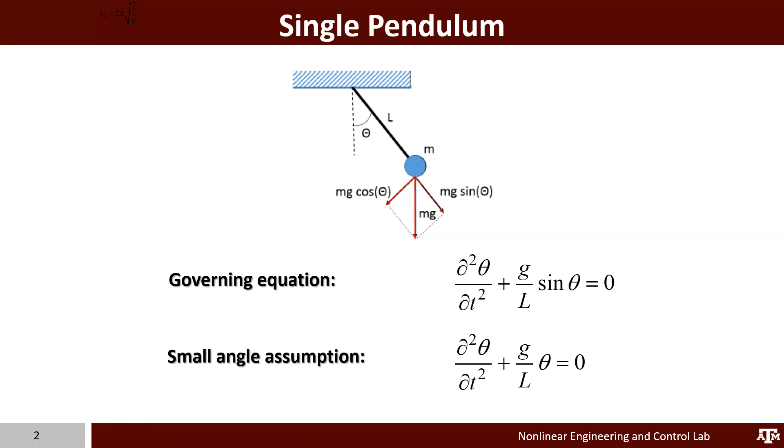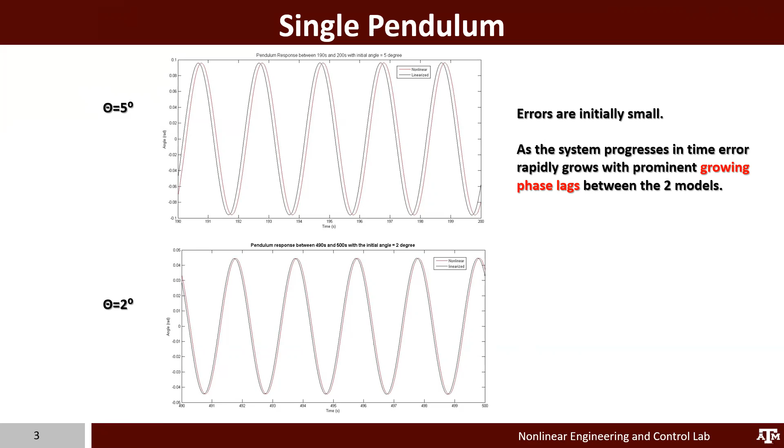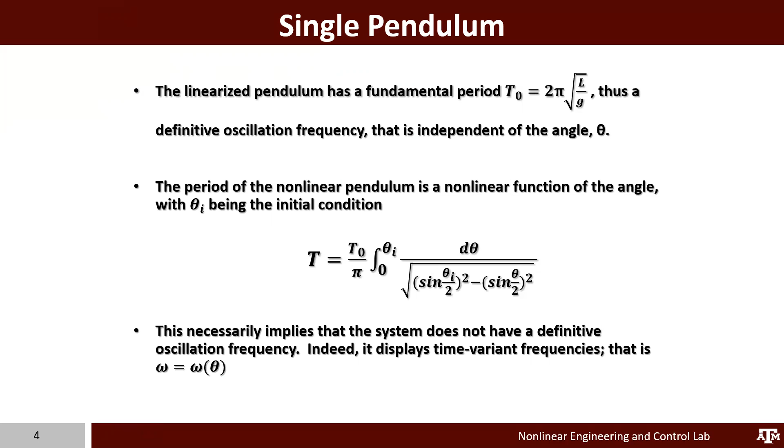And indeed, for the linearized pendulum, there is a definitive fundamental period, which is not a function of theta. But however, for the nonlinear pendulum, the period, or in other words, the frequency, is a function of the initial condition theta_i. This necessarily implies that the system does not have a definitive oscillation frequency. Indeed, the frequency is time variant, it depends on theta.

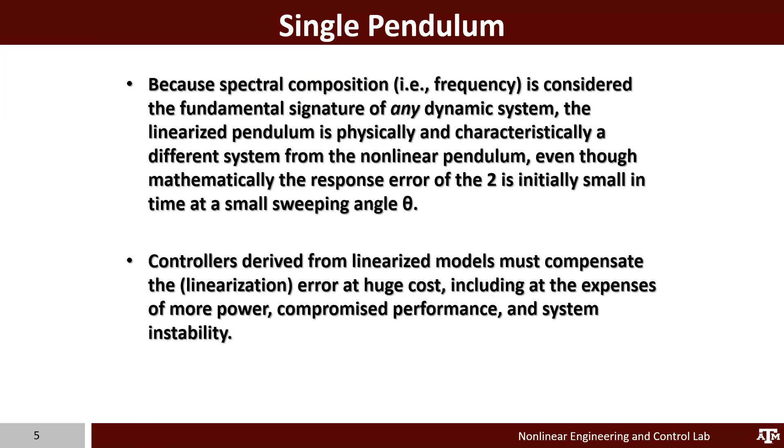Because the spectral composition is considered the fundamental signature of any dynamic system, the linearized pendulum is physically and characteristically a different system from the nonlinear pendulum. Controllers derived from linearized models therefore must compensate the linearization error at a huge cost, including at the expense of more power, compromised performance, and system instability.

Let me make a few arguments out of those observations that we made with the linear and nonlinear pendulums. Linearization distorts and misinterprets true dynamics. The moment Taylor's expansion is employed, stationary dynamics is assumed.

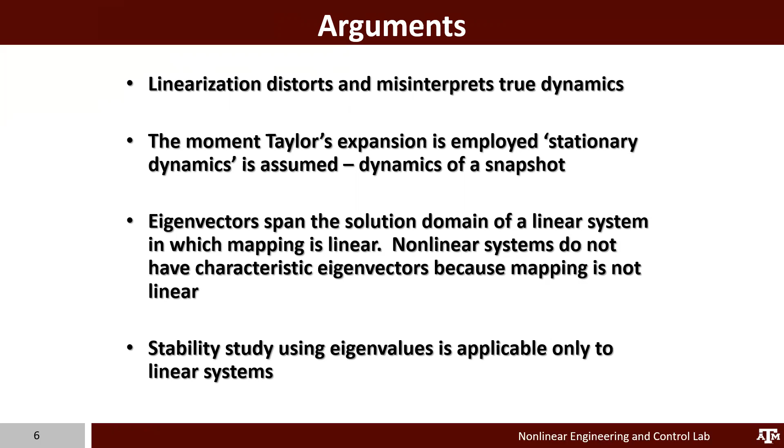Eigenvectors are mutually orthogonal, so they are basis functions that span the solution domain of a linear system, where the mapping is linear. However, nonlinear systems do not have characteristic eigenvectors because the mapping is not linear. Stability study using eigenvalues is therefore only applicable to linear systems.

Contemporary control theory shares the following: they usually engage in linearization, most if not all of them ignore time-frequency coupling, they also employ feedback, and they also make assumptions to make the solution process easier.

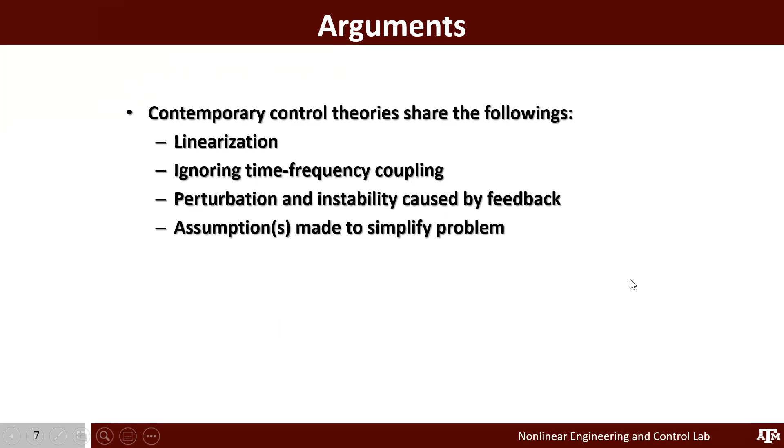The issue with linearization, as we saw with the example on the pendulum, is that it distorts the genuine characteristic of nonlinear dynamics. And plus, the linearized system is not able to resolve the route to chaos.

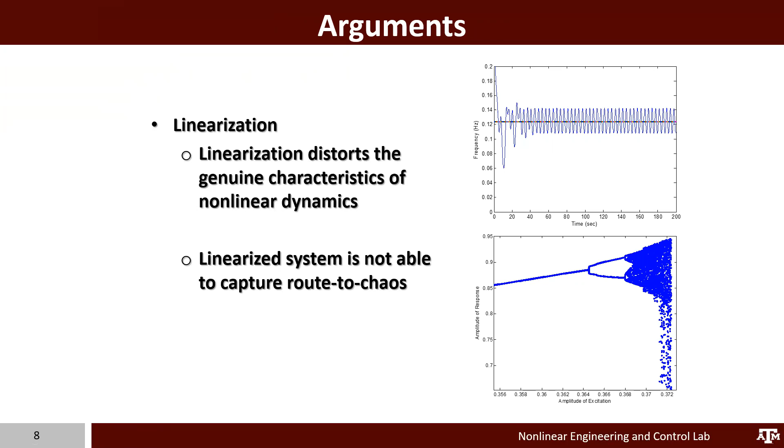The second thing is, we all know through the uncertainty principle, right, that time and frequency are coupled. They're two sides of the same coin. And then later on, I'm going to use several examples to show you that for a chaotic system, the frequency response is unstable as well as broadband.

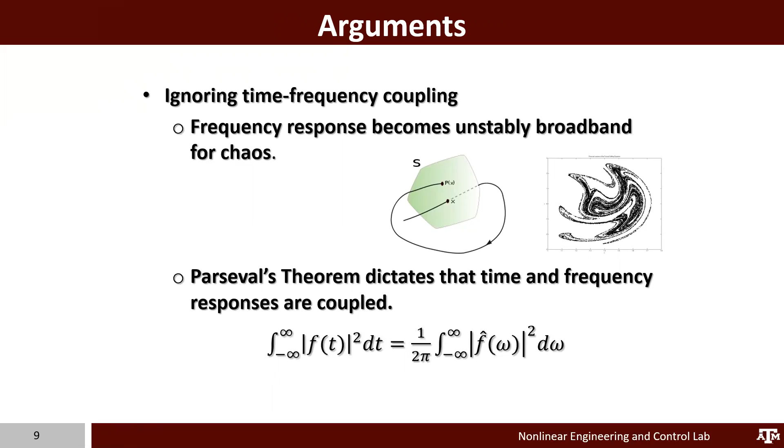Employing feedback, because nonlinear systems are all highly sensitive to initial conditions, the feedback essentially provides the system with ever-changing different initial conditions for each and every control loop, and that serves to perturb the system. I'm going to use an example to demonstrate this point later on.

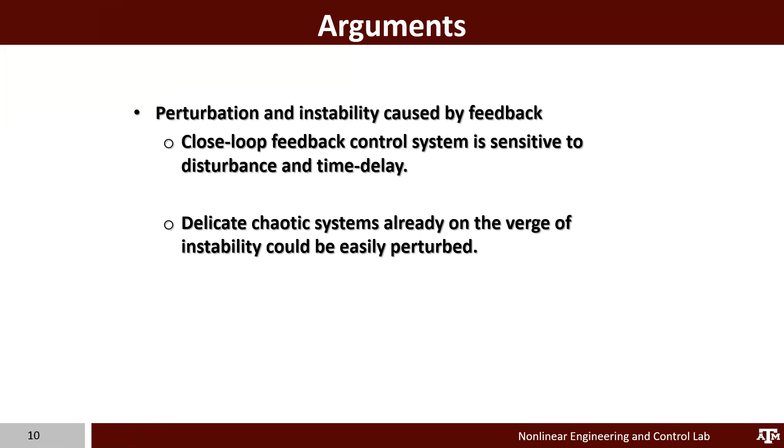With the feedback feature implemented, the system actually tends to behave in a way that at the minimum shows instability, and at worst shows something that is aphysical.

The assumptions, oftentimes all kinds of assumptions were made. The most prominent one was assuming that the route to chaos process is stationary. But however, in the true physical system, route to chaos is non-stationary.

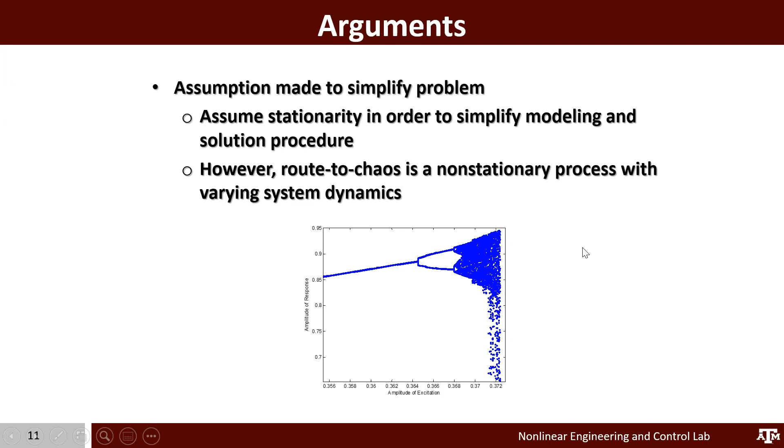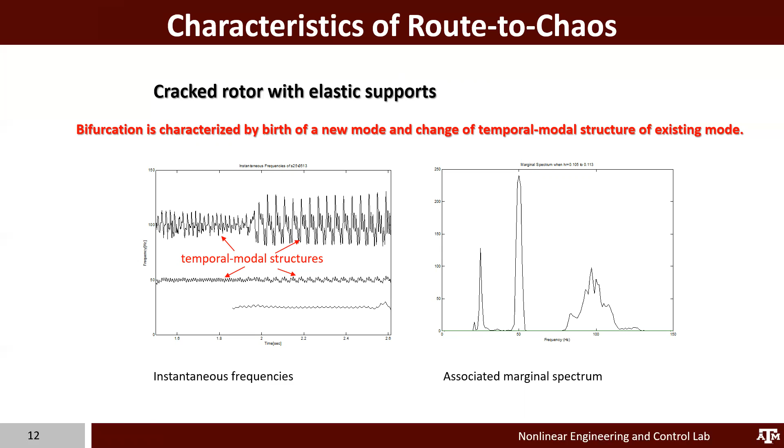These are the fundamental characteristics associated with a system undergoing instability on its way to chaos. As the dynamics deteriorate even further, we see more lower frequency modes being born, accompanied by rather prominent, significant changes of temporal modal structure in the existing modes.

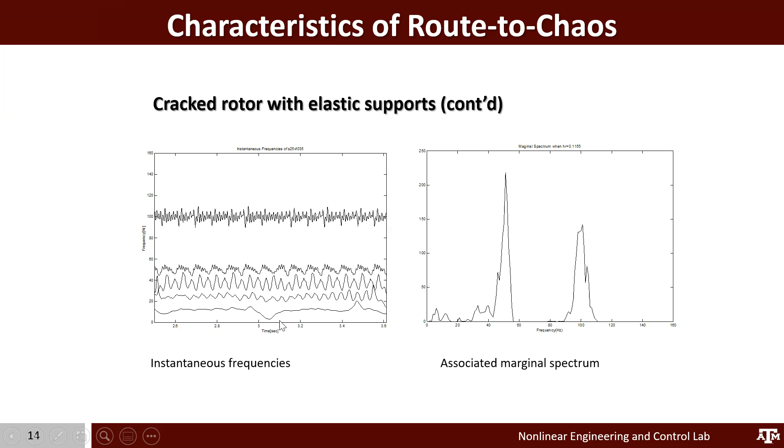So that was the preliminary observation when a system is undergoing bifurcations and becomes unstable. Let me give a quick review of more than a dozen modern day control theories.

The first one, probably the most well known, is the OGY method. OGY perturbs a discontinuous parameter. It forces a trajectory to follow a target UPO in a chaotic attractor, and the OGY method uses the eigenvalue of the system's Jacobian at a fixed point to establish stability.

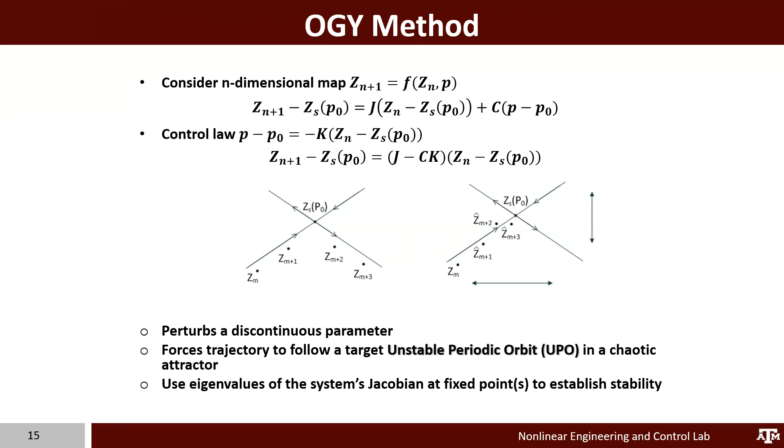Let me sidetrack just a little bit to point out that Jacobians, which employ Taylor series, are actually a multidimensional linearization, as we can see, with only the linear terms in the equation being retained.

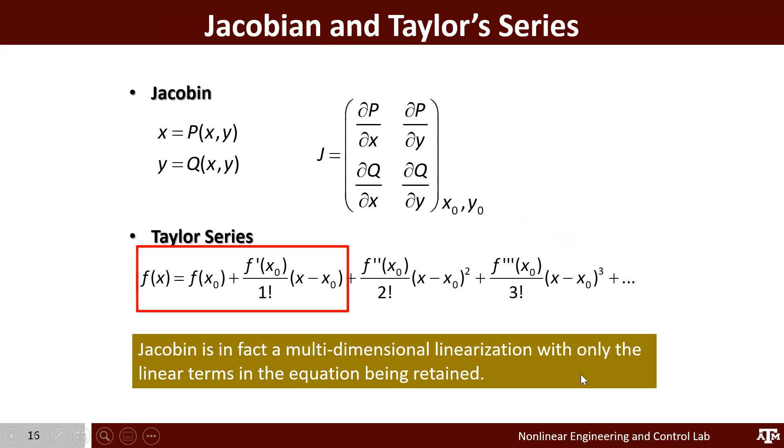But this controller is only effective up to a certain point, and beyond that, the system becomes unstable. This dynamic instability rather abruptly becomes highly unstable, extreme. So this OGY method, being based on the Jacobian, can only be applied in the proximity of a predetermined fixed point.

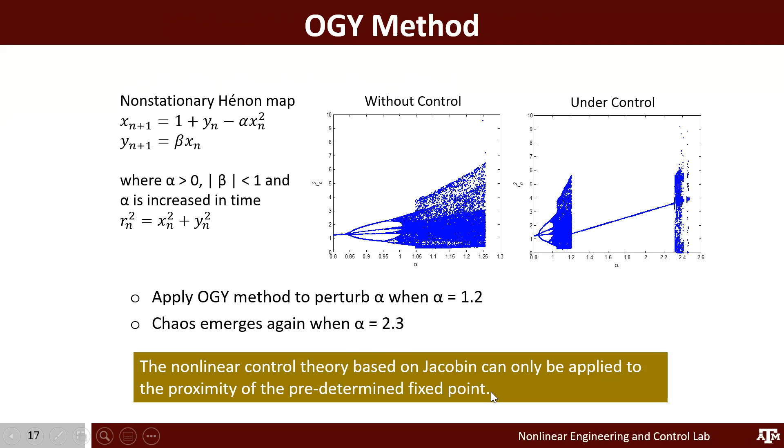The second method I would like to review is Lyapunov-based control. Lyapunov requires the design of a control law based on heuristic methods.

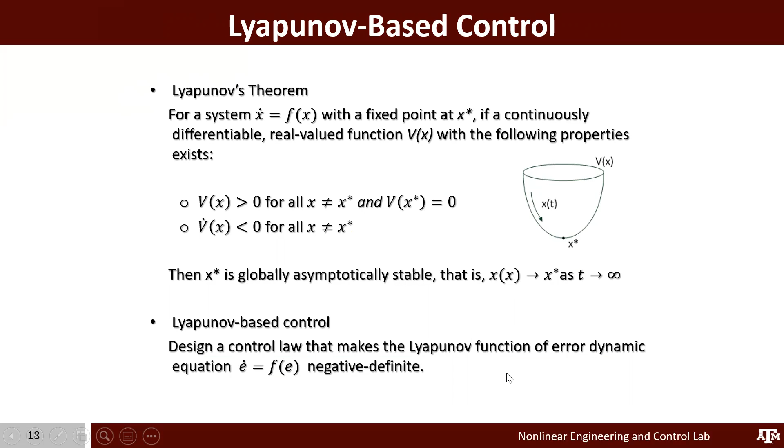This is an example applying Lyapunov-based control to two Duffing oscillators. We consider two Duffing oscillators, with the second one having a forcing term which is non-stationary. We apply Lyapunov-based control to the stationary model and also to the non-stationary model, and you can see from the two corresponding instantaneous frequencies that Lyapunov-based control worked well.

However, from this graph, we can see that when the model is non-stationary, Lyapunov-based control basically breaks down. We see that all the frequency modes become highly unstable, and it becomes progressively more broadband.

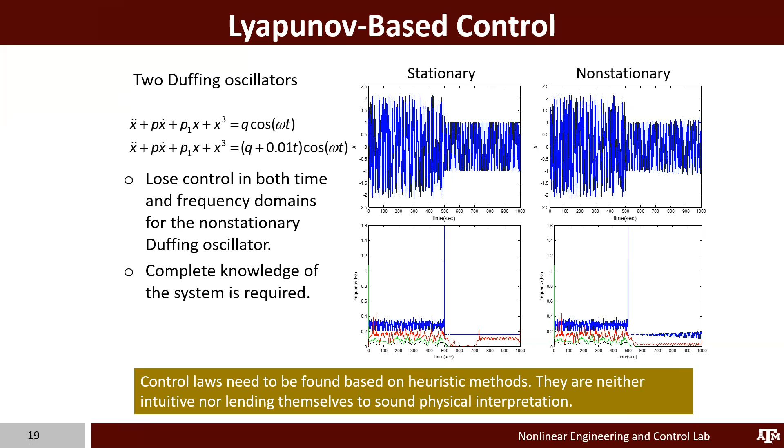I would also like to make a comment on Lyapunov-based control: the control law is usually neither intuitive nor lending itself to sound physical interpretations.

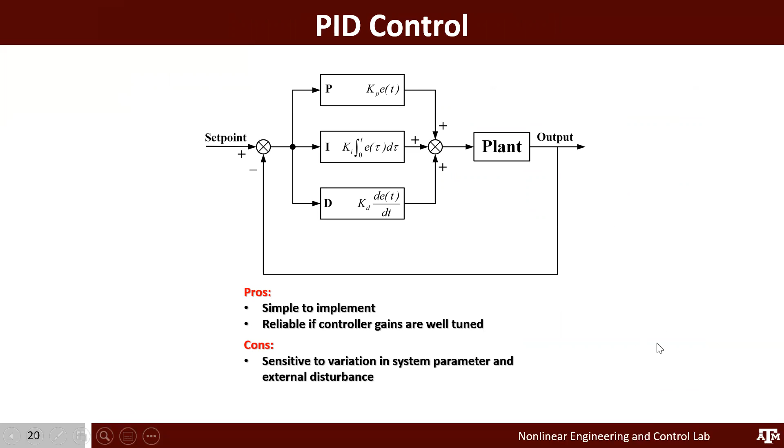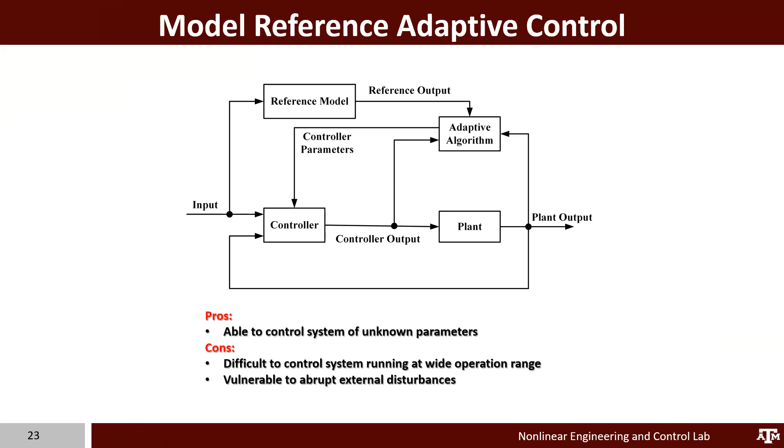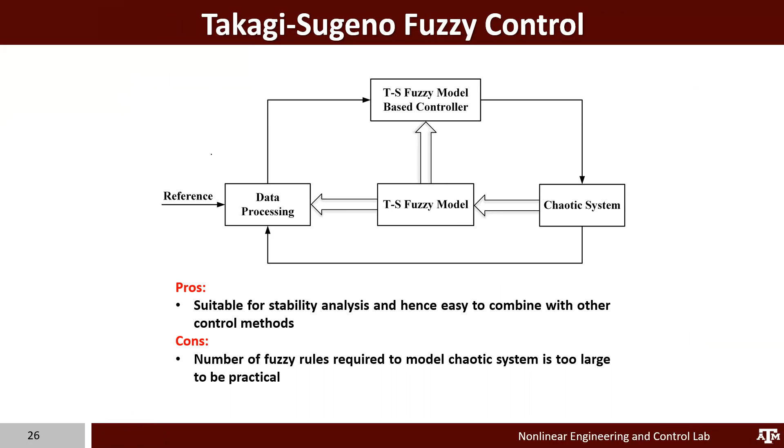Quick review: there is also PID control, which is quite common, those being the most common applications. Also adaptive PID control, fuzzy logic control, model reference adaptive control, feedback linearization control, time delay feedback control, Takagi-Sugeno fuzzy control, and sliding mode control. This control methodology has gained very wide popularity in the last few years.

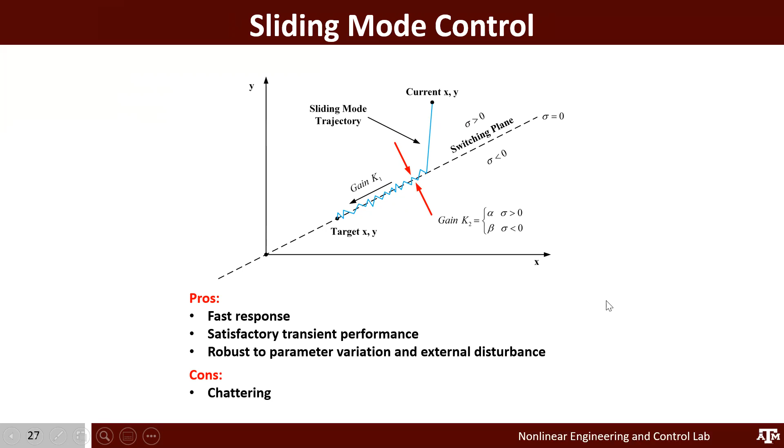The issue with it is there is always chattering. Chattering indicates instability, indicates high frequency. It has all kinds of negative impact on control stability and also robustness.

Adaptive control and backstepping control: there are several issues with this particular control methodology. The control design is tedious, and the control law is oftentimes too involved to be practical.

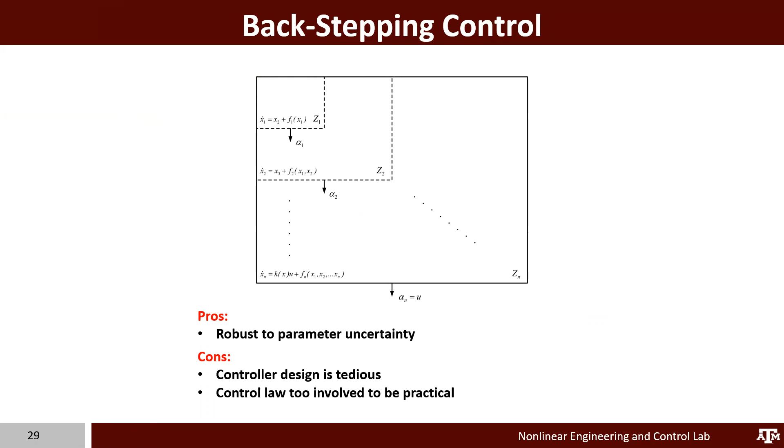Let me summarize the observations from the review we made over the last dozen slides or so. We reviewed the control theories, and they all fail to mitigate dynamic chaos.

A priori knowledge of the system needs to be available for the control theory to be effective. And none control both time and frequency response simultaneously.

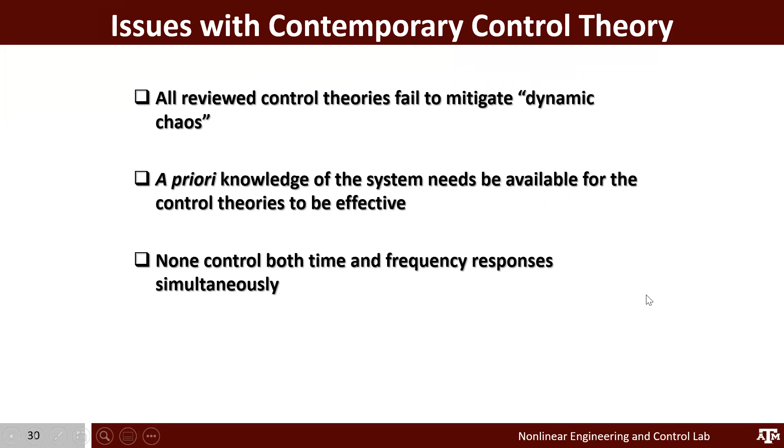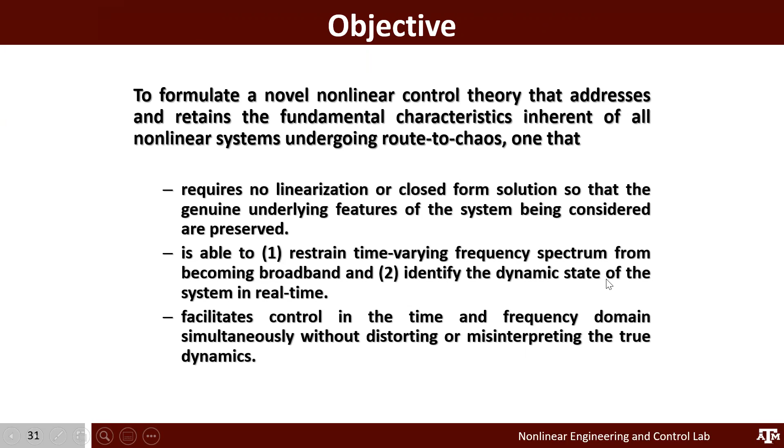So about 15 years ago, I wanted to formulate a novel control theory that addresses and retains the fundamental characteristic inherent of all nonlinear systems undergoing route to chaos. A theory that requires no linearizations or closed form solution, so that the genuine underlying features of the system being considered are preserved. The theory also needs to be able to restrain time varying frequency spectrum from becoming broadband, and also be able to identify the dynamic state of the system in real time. Lastly, the theory needs to facilitate control in the time frequency domain simultaneously without distorting or misinterpreting the underlying true dynamics.

At that point in time, I developed a task plan with several tasks identified and defined. The first is to investigate route to chaos in time and frequency domain concurrently, to identify the essential elements of nonlinear control through studying the inherent property of bifurcation and chaos. These are fundamental to developing a nonlinear control theory that requires no linearization and closed form solution. And how do I facilitate simultaneous time frequency control? Through accessing wavelet transform.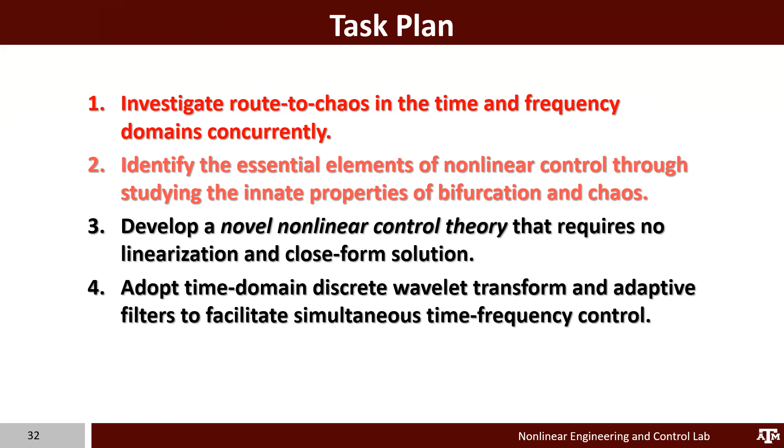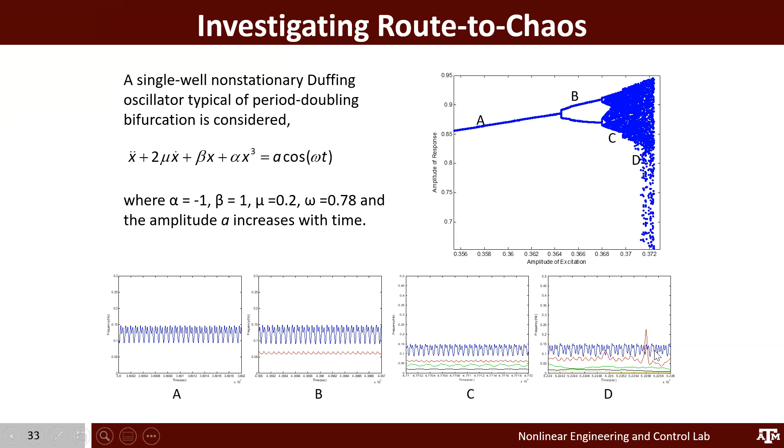As you can see, region A has one single mode with very well defined temporal modal structures, with this frequency seemingly oscillating following a specific period in time. And then as the system becomes further bifurcated into B and C, what we see is more modes showing more sophisticated temporal modal structures. And then as we reach into region D, the overall Duffing oscillator system response actually becomes broadband.

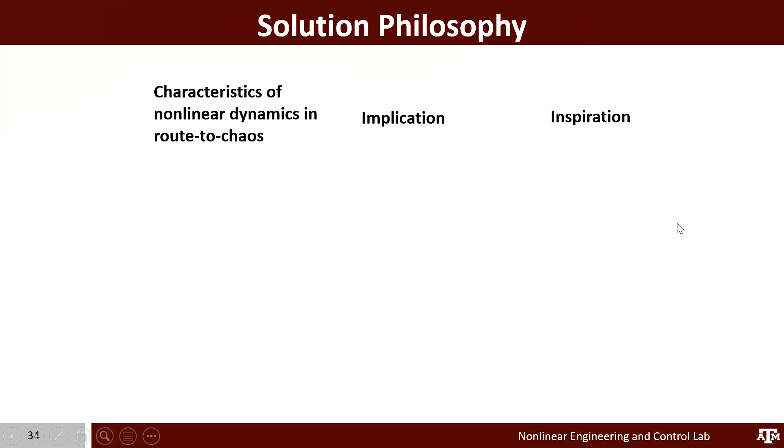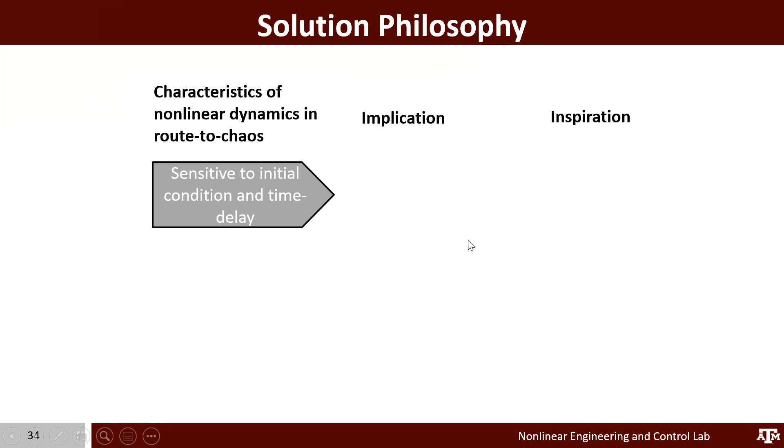So now let me summarize my solution philosophy, based on all the observations we made with regard to the property of nonlinear response. The first is a nonlinear system is highly sensitive to initial condition and time delay. This implies the use of feed-forward control concept.

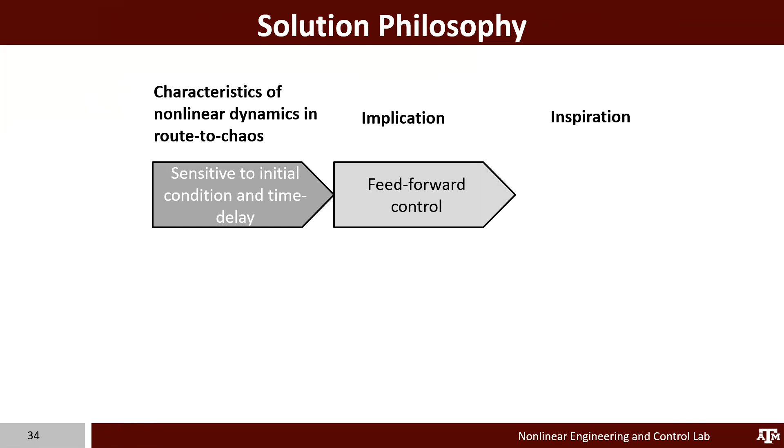And then I took inspiration from adaptive filter. The second property is deteriorations in both time and frequency domain. When the dynamic system becomes unstable, as it takes up a route to chaos, the deterioration is actually in both time and frequency domain. This implies the need for addressing both time and frequency responses at the same time. And I took inspiration from discrete wavelet transform.

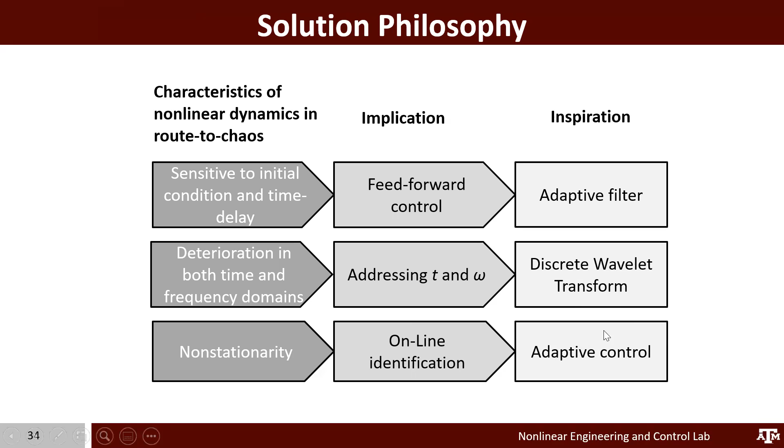The last property is a route to chaos is time dependent. The entire process is non-stationary. This implies the need for online identification, if proper control is to be secured and realized. And I took inspiration from modern day adaptive control.

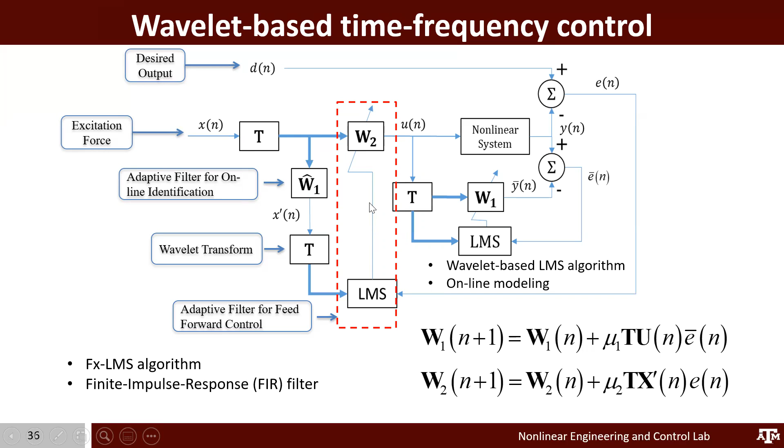And to update filter W1 and W2, we need to pay attention to this optimization step size, mu1 for W1, mu2 for W2. As you can see from this steepest descent algorithm for updating the filter coefficient, mu1, which is the optimization step, is important in the sense that it essentially determines the convergence speed, the solutions and stability.

So if mu1 was not properly chosen, then it may not be easy to have converged solutions, and the system could easily become unstable. And then through rather meticulous iterations, we found that mu1 can be updated at each and every control step using this simple criteria.

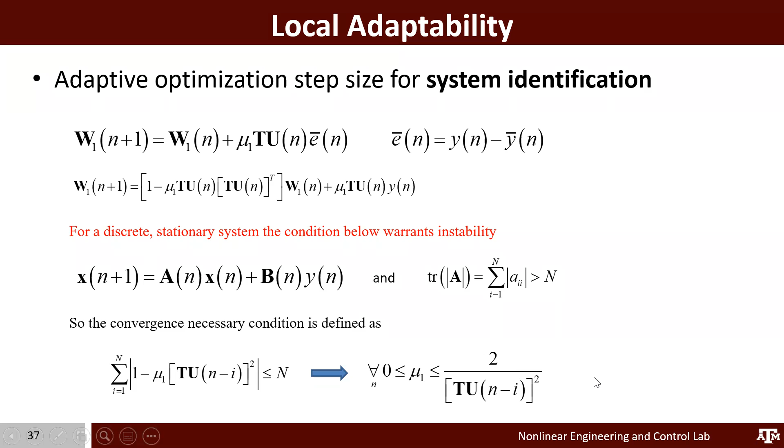Same thing with mu2, which is used for updating the W2 filter for facilitating controlling input. Through very meticulous derivations, the entire process took about 126 equations to eventually allow us to arrive at this, which establishes the criterion for setting up the optimal step size for mu2, for updating the filter W2.

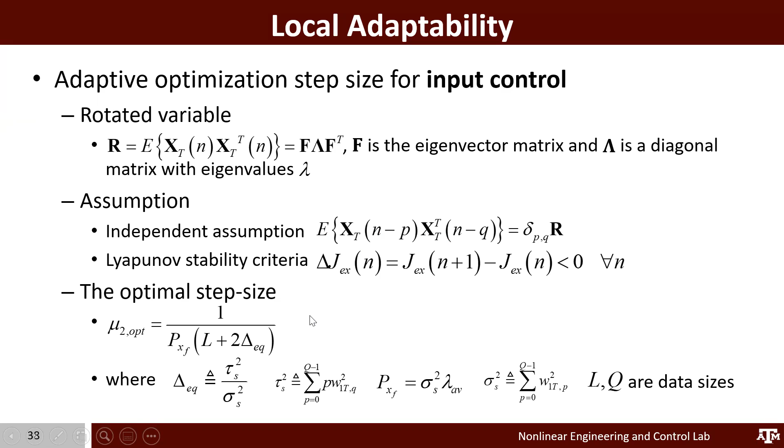Mu1 and mu2 are both updated at each and every control step. That's why I named it both our control theory as one with local adaptability. The use of proper mu1 and mu2 ensures the stability and fast convergence of the controller.

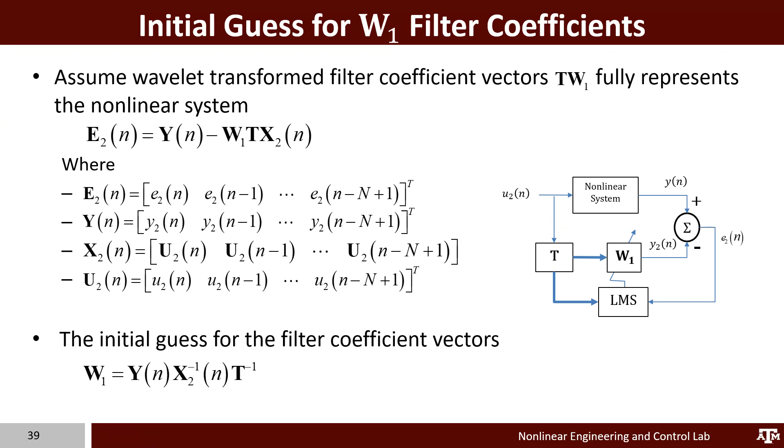And also, because we're dealing with control theory for controlling nonlinear systems, it's very important that we get the W1 filter coefficients and the W2 filter coefficients right for the first guess, in terms of the initial conditions. Through a rather meticulous, comprehensive derivation, we also have a way to show what would be the optimal, proper initial guess for the W1 filter coefficient as well as W2.

Now it's time to apply the control theory to a few applications to demonstrate the viability of this control theory. The first one we consider is the grazing control of a vibro-impact oscillator. As the name grazing indicates, this is a discontinuous system, and grazing, as a sophisticated, rather involved discontinuous dynamics, is very difficult to control.

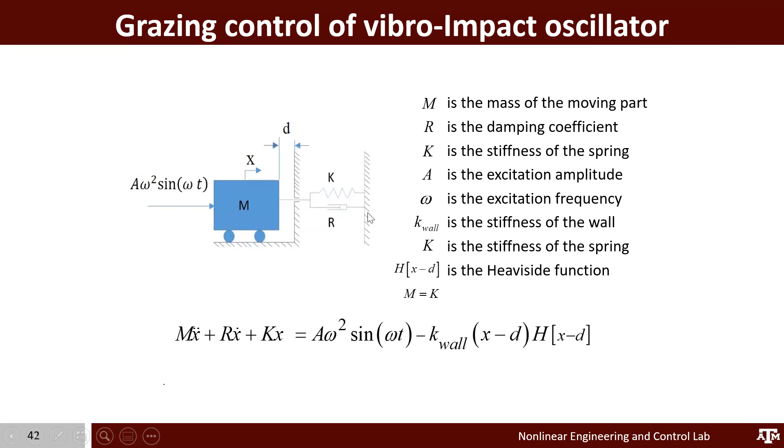So now this is the model that we use, with the Heaviside functions defined as such. Essentially, this is a cart driven by a harmonic input, and this cart, without a controller, would run into and make an impact with the wall on the right. Through the proper use of X0, we normalize and turn the space variables into dimensionless terms, so the entire governing equation now looks like this with dimensionless state variables.

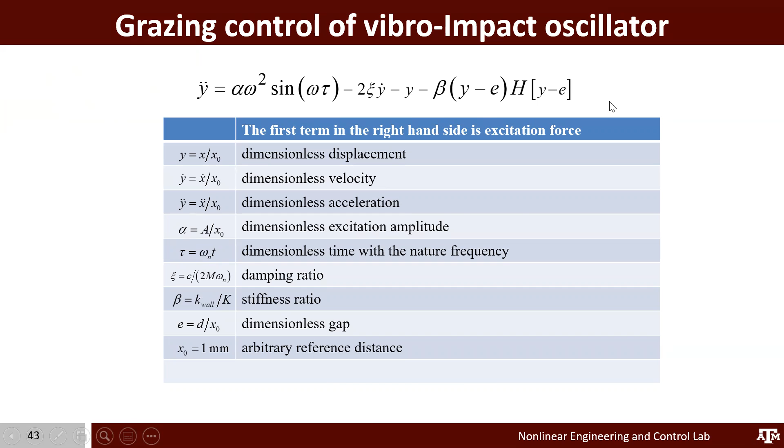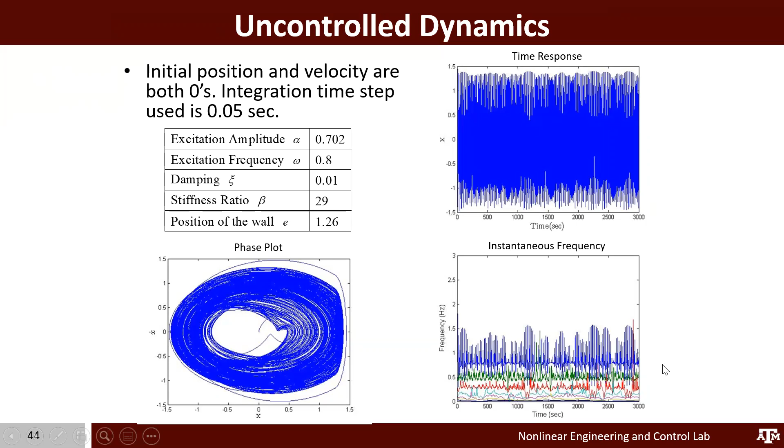Using this table right here to replace alpha, omega, xi, and all that with those numbers, we did a simulation. What we're seeing here is the phase plot of this oscillator. As you can see, the entire response is highly discontinuous, highly nonlinear. As also tested, the same is the instantaneous frequency plot on the right. There are many different modes, with very sophisticated, intriguing temporal modal structures, all present. From the instantaneous frequency, it's also clear evidence that the response is broadband with a changing spectrum.

And this is with the controller specified with the desired target, with the desired frequency 0.8 and the amplitude 0.5 for the desired target. We turn on the controllers at around 200 seconds. What we're seeing here is that once the controller got turned on, the system very quickly got put under control.

And then when it reached the steady state, in a sense, that is realized as a limit cycle in the first phase portrait on the left. You can see that now the system, response-wise, follows a well-defined, highly predictable limit cycle. The corresponding desired error also got reduced to a level that is considered negligible. That means the system got put well under control.

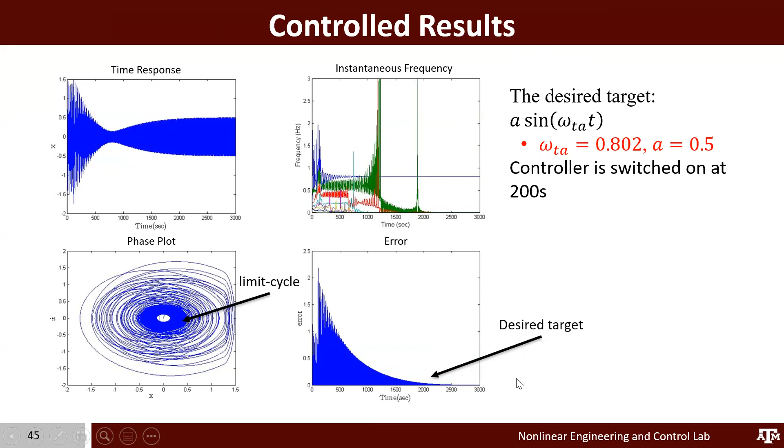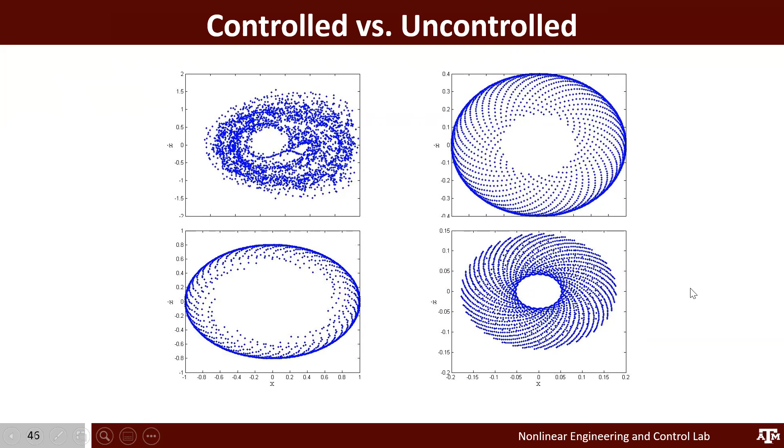The second example I'd like to share with you quickly is using the nonlinear time frequency control to control a non-autonomous time-delayed feedback oscillator. This time delay system has rather prominent cubic order feedback, as you can see, and it also has a system level cubic nonlinearity as well. So, without saying, this is a very difficult system to control. Now, using all these parameters, we did a simulation.

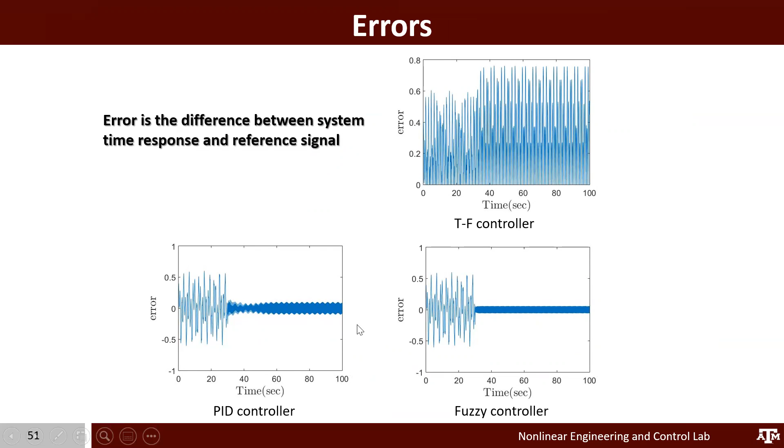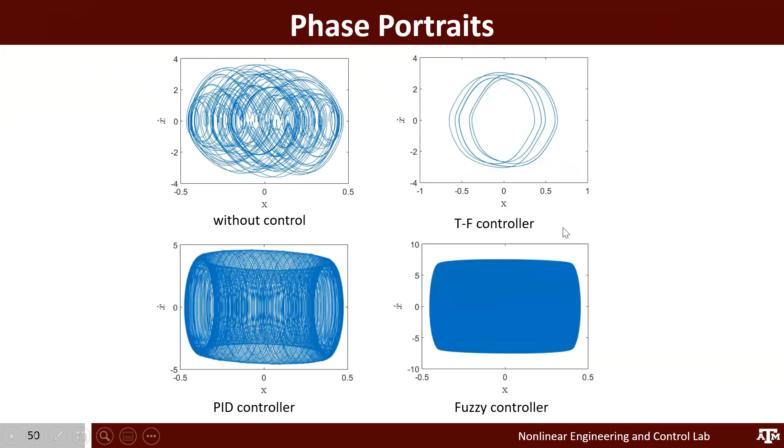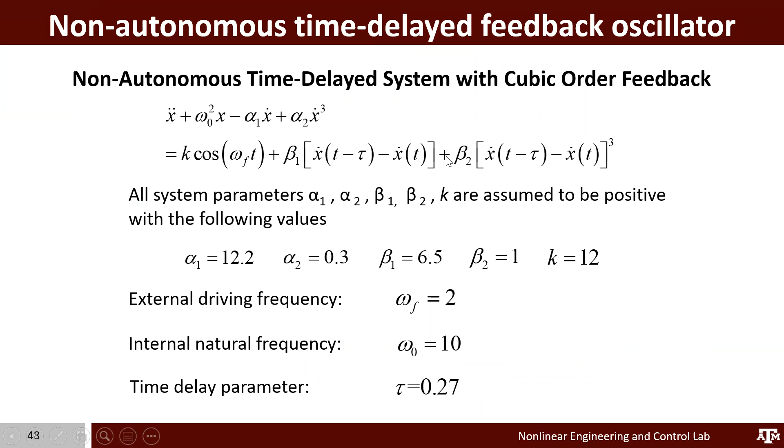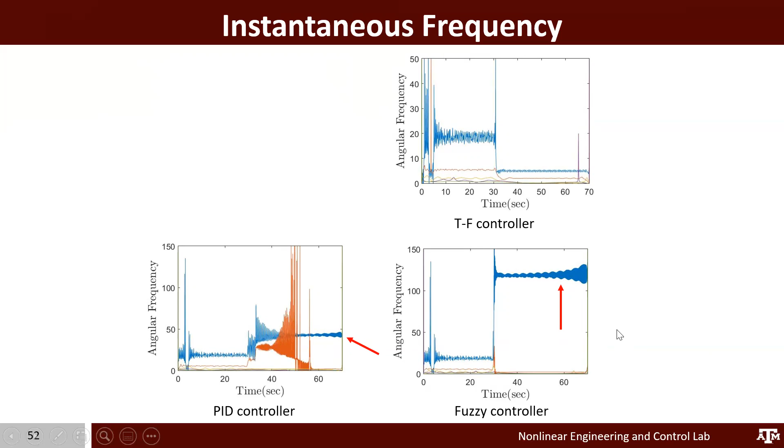So you may ask, how and where did they come from? Well, let me go back. Because this is a time delayed feedback oscillator, this time delay serves as feedback to perturb and sway the dynamic state of the oscillators. That resulted in the system behaving in a way that is fully undesirable and probably totally unexpected, making the system even more difficult to control.

The last example is on the permanent magnet synchronous motor. Permanent magnet synchronous motors are now very popular; you find them in almost all industry applications, as well as in hybrid and electric cars. The popular speed control scheme for controlling the permanent magnet synchronous motor is field-oriented control.

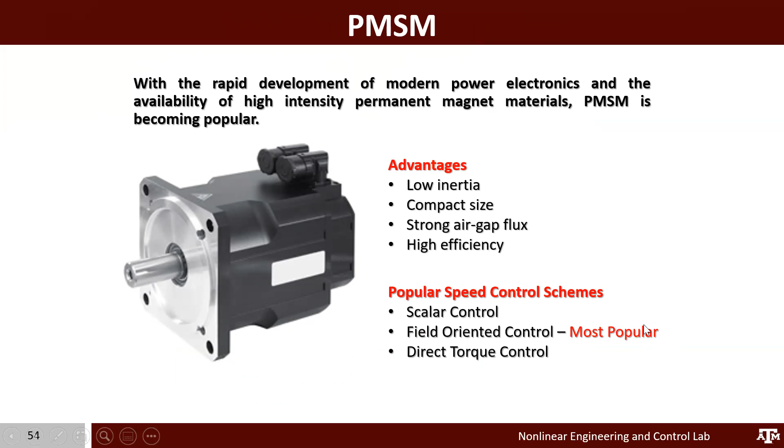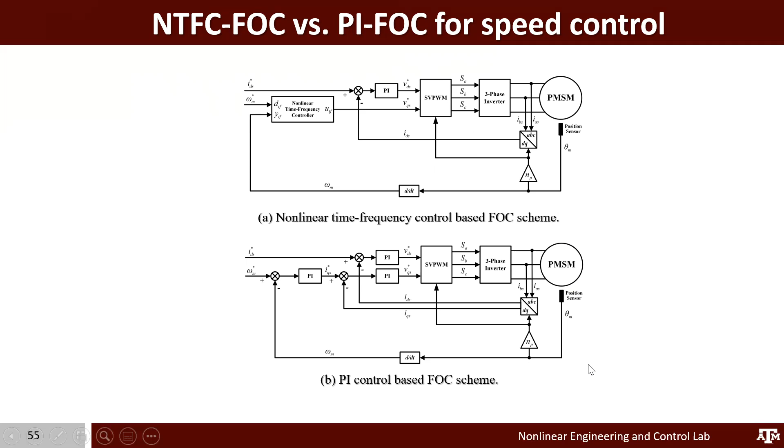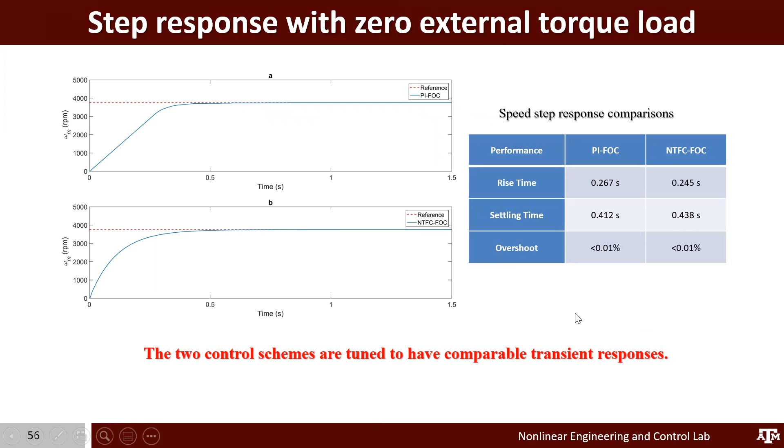We considered that, and implemented nonlinear time frequency controllers into this FOC structure, then compared it to the PI-controlled based FOC scheme, to evaluate the nonlinear time frequency controller against the most popular PI-FOC controller. We tuned these two control schemes the same way so that both could reach the same transient response with the same response time.

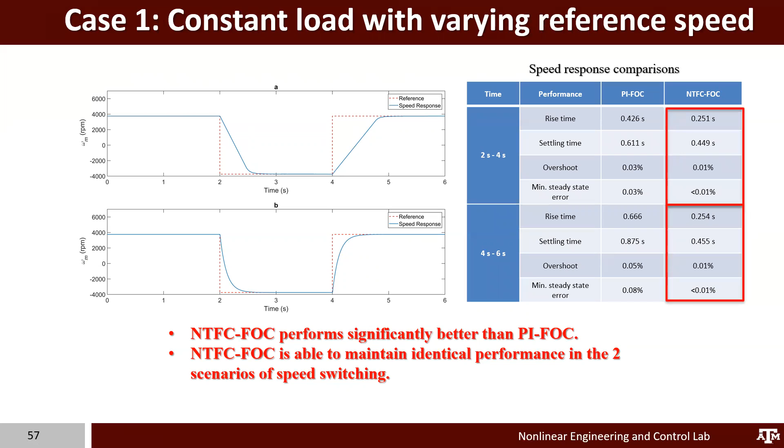The plot on top corresponds to the PI-FOC, and the one below corresponds to the nonlinear time frequency FOC scheme. As you can see, the nonlinear time frequency based control scheme performs much better than the PI based one. Next, this shows you all the corresponding responses from the motor as the control results.

Let's take a closer look at subplot B. This corresponds to the electromagnetic torque response of the two control schemes; the one on top corresponds to PI, and the one below it corresponds to nonlinear time frequency control. You can see that the electromagnetic torque response under the PI-FOC control actually suffered from major oscillation and delay in reaching the target steady state. This is also attested if we look at the tracking error, where the PI-FOC suffers from zigzagging in its error.

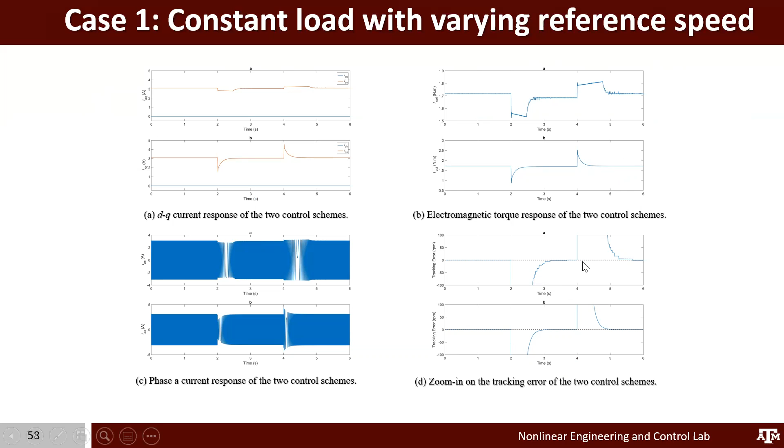Now, this strongly indicates that systems would undergo significant power consumption and significant error in dynamic instability. The second case we consider is when the motor is running at constant speed, but this time with external torque applied to temporarily disrupt and perturb the system.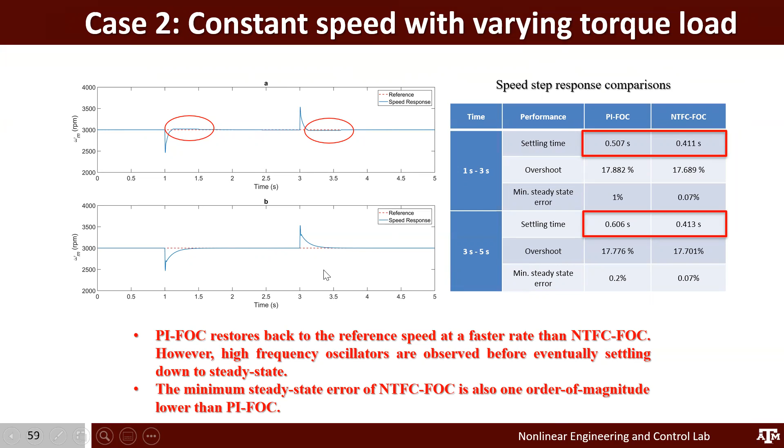When the system is experiencing physically something as such, that means the system is going to hum, make a high frequency pitching, and at the same time draw upon significant power trying to overcome this instability. Physically, we're not observing the same thing with the nonlinear time frequency control FOC.

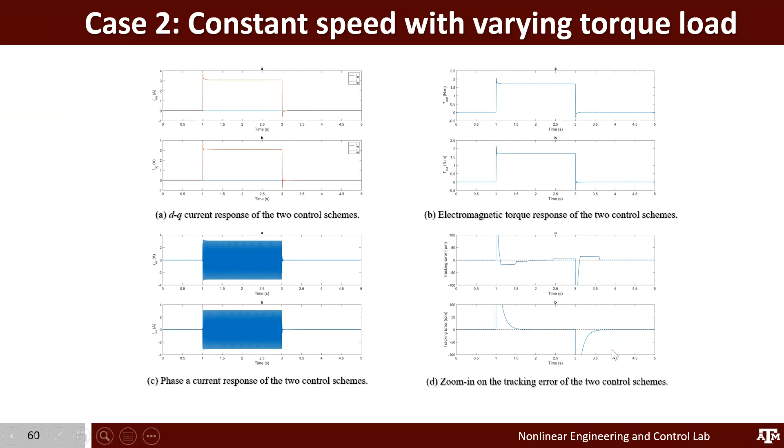Now let's take a look at the corresponding tracking error. The PI-FOC scheme demonstrates significant tracking errors over a range of several seconds. This indicates instability, indicates improper control, but not so with nonlinear time frequency control FOC.

I would like to mention that nonlinear time frequency control scheme, once incorporated to control the permanent magnet synchronous motor, can be used to achieve both speed and position control at the same time. All those existing motor control schemes out there cannot do the same.

They can either do position control, or they'll have to come up with something different, a different controller, to do speed control. No controllers out there can achieve simultaneous tracking of the position as well as speed control.

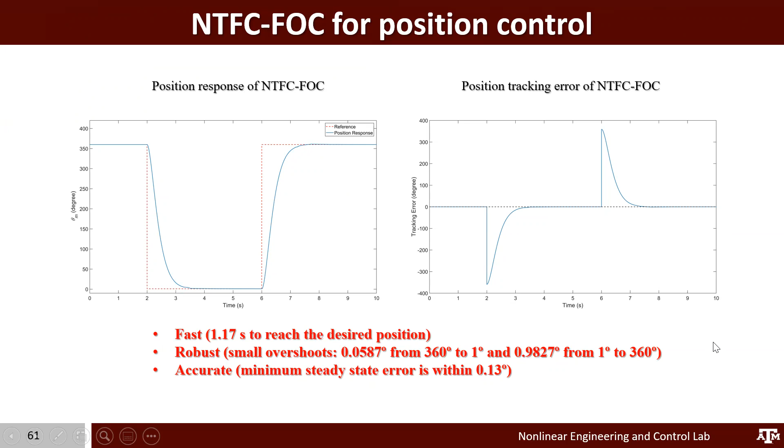Nonlinear time frequency control FOC is fast, robust, and accurate for controlling this particular permanent magnet synchronous motor. We didn't just content ourselves with doing all this modeling and simulations.

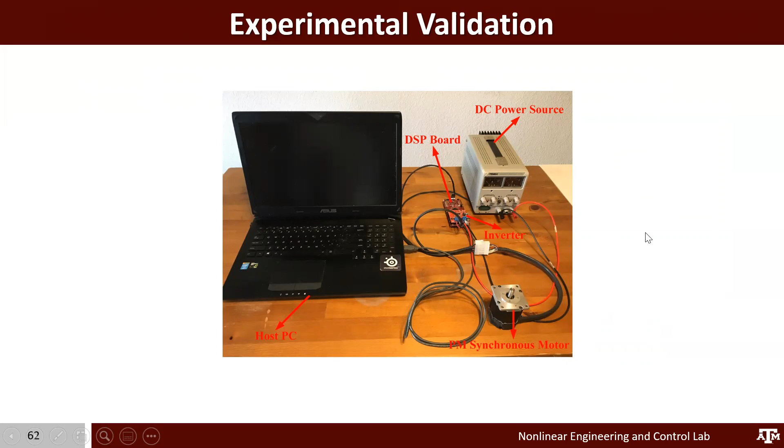Let me show you this testing, evaluating nonlinear time frequency control against the PI-FOC. We followed what the vendor suggests to implement both infinite impulse response filters and the PI-FOC structures.

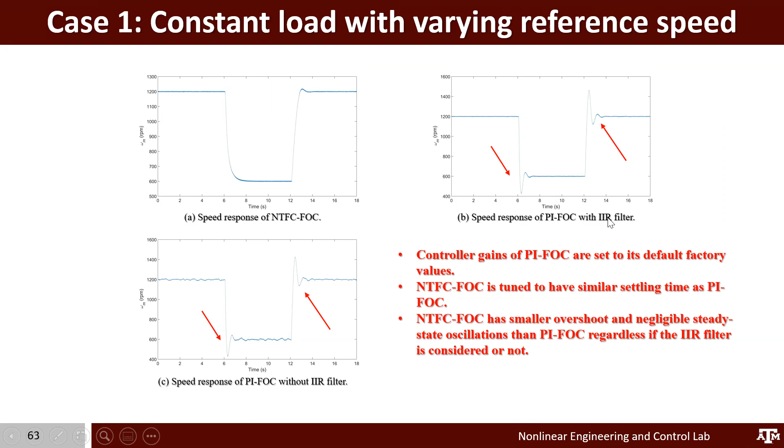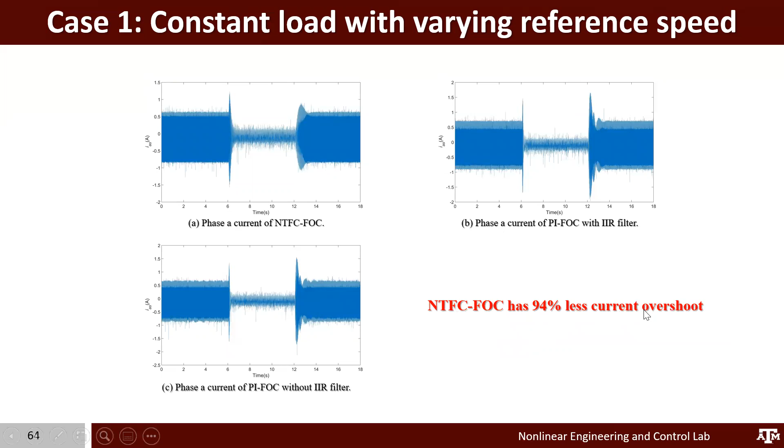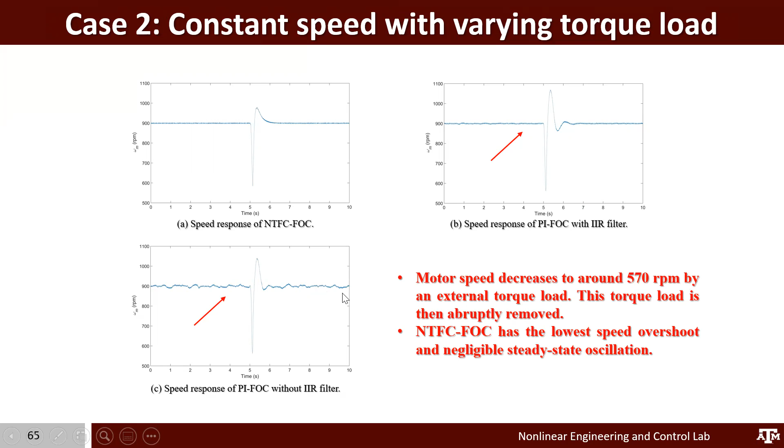That would also mean that the motor requires much more power to overcome all this oscillation and this state of instability. Also, as you can see in this case, without the IIR filter, the motor actually never gets to settle down within this time window considered.

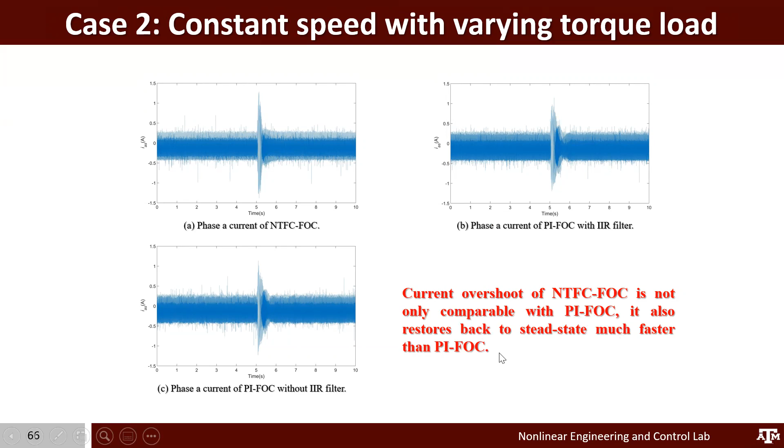Again, when we're holding the motor speed constant, and this torque is suddenly applied and suddenly removed, what we're seeing here from our physical data shows the nonlinear time frequency FOC controller is not only comparable with the PI-FOC, it also restores back to steady state much faster with a much higher level of robustness and stability than the PI-FOC.

So that should conclude my sharing. Thank you very much.